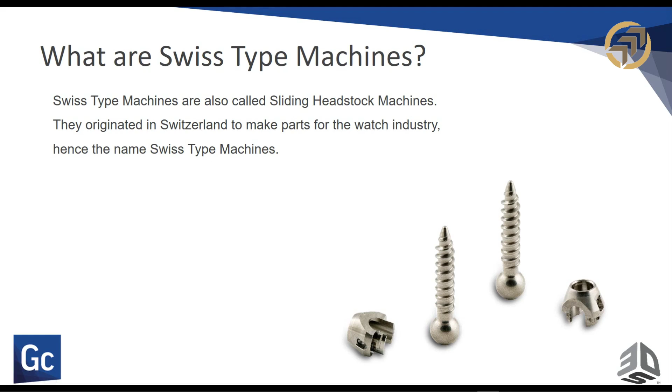What are Swiss type machines? Swiss type machines are also called sliding headstock machines. They originated in Switzerland to make parts for the watch industry, hence the name Swiss type machines or Swiss machines. Let's look at some Swiss machines. Let's see what we have here. All right, jumping right into it.

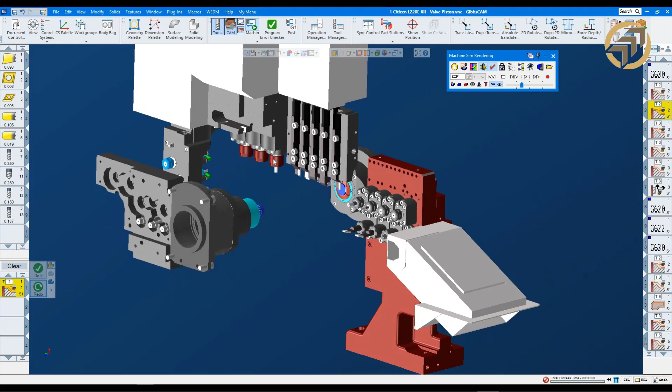Okay, here we have a Swiss style machine with the sliding headstock and the guide bushing on the right hand side. Our sub spindle is on the left. We have, of course, the gang with our turning tools on top, some milling tools on the top as well. Then this machine has a B-axis with tools that can access the main spindle, and on the other side you can access the sub spindle for B-axis machining angular features on the part.

And then we have another set of tools, four back turning tools. The upper ones are live, the lower ones are stationary, and then we have a parts catcher where we drop off the part once we're done. All right, let's run the part and see what's going on so you have a little bit of an idea what we're going to be talking about.

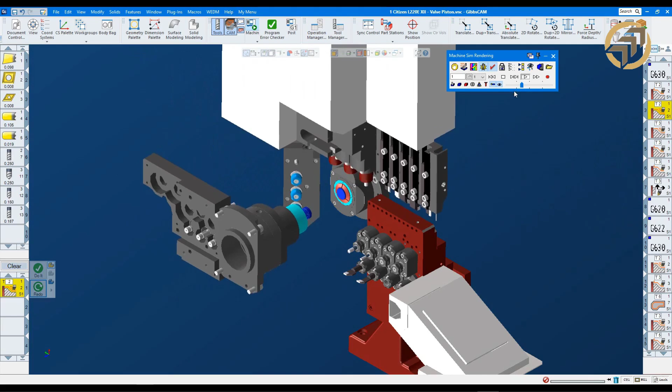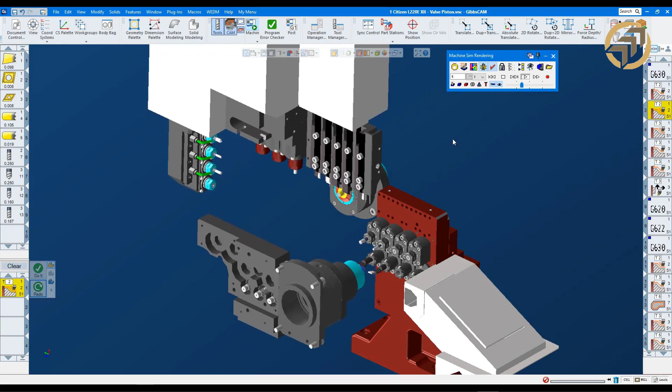Okay, so we are machining on the sub spindle with our B-axis right away, putting some angular features on it. Then the sub spindle goes over, machines the back side of the part on the fixed post, and the main spindle tools on the gangs machine on the guide bushing with the sliding headstock. Let's continue on. Let's watch the part running through.

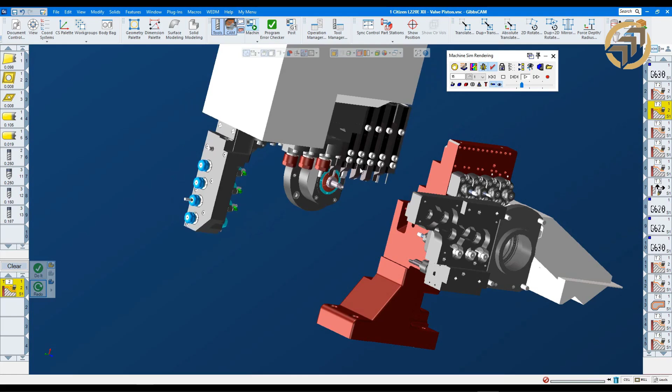Here we're machining the backside with the sub spindle tools over on the main spindle, doing some drilling, then more machining on the main spindle, grooving, more grooving, and once we're all done, we do some B-axis machining on the main spindle as well, putting some nice little chamfers there, and then we continue on.

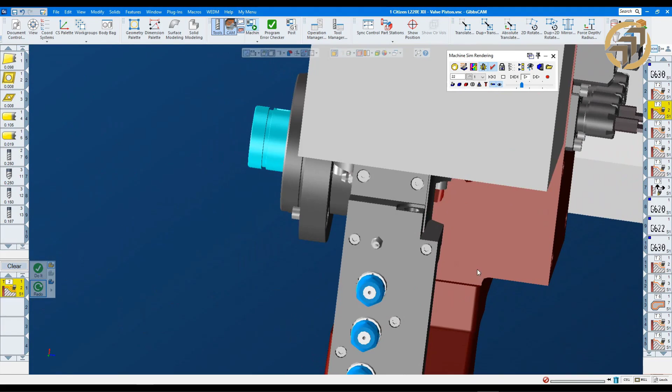Machining our part, more grooves. This is a valve piston, so there are lots of grooves on there. Now the sub spindle came in and is picking up the part. We're doing cut off, and the sub spindle returns to home.

Okay, we're going to look at it again, but I want to show you first one other thing here, where we usually select our machine. This is what we call our DCD, Document Control Dialog. Here we select the machine, whichever model we have on our shop floor that we want to program.

The material that we're machining, the size of the material, facing allowance, how long the part is, stock size, the gap between the tools and the guide bushing. Those numbers are grayed out because they are fixed depending on what guide bushings you're using, and this length here is quite important. This is the length of the guide bushing, basically how long our part is being supported when it's being pulled back inside. That happens of course on the Swiss machine.

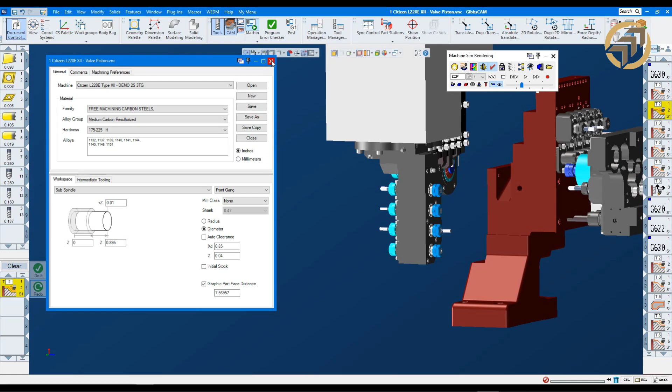And then a couple of other things, auto clearance, stock approach and retract, and then some more on the sub-spindle side, the stick out length, how far our part is sticking out after we cut it off. This is pretty much it. We are in inch or millimeters, depending really on our part, which way we want to program. It doesn't really matter. We can do both. I want to close this again.

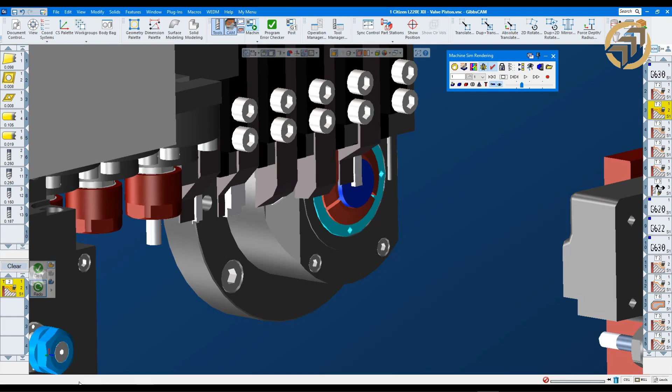And then I want to show you something that's quite important for Swiss style machines. First I rewind, of course. Let's do a rewind, and then look at it again, just like this, and I run it a little bit to a spot where I want to stop it, and we're right there, where I want to show you something that's rather important on a Swiss style machine.

So on Swiss style machines, the stock is moving in and out of the guide bushing, the red part here. So it happens once we start machining the part on the front. I'm slowing it down a little bit. As you can see, we're machining the diameter, and then we machine again, and we pull back the stock into the guide bushing.

And this is something that we have to be very careful with, because we may have left a burr on the outside diameter with our first cut, and when we pull back into the guide bushing, we may actually damage the guide bushing with that burr that's sticking out. So if I keep going,

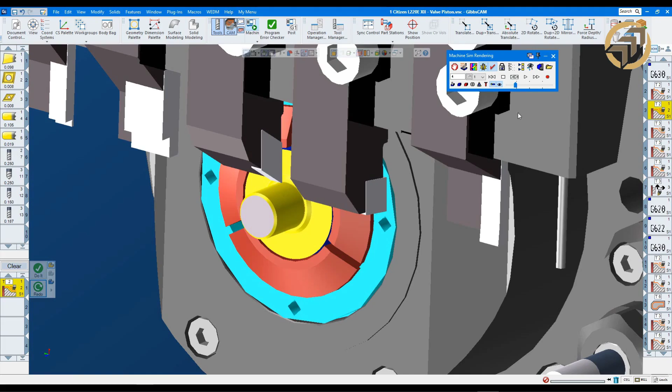I want to show you what we have in GibbsCAM that really lets us take a nice chamfer on that outside edge that we have machined, so when we pull back into the guide bushing, we are not sticking out that burr. Okay, this is our operation.

This is our roughing toolpath, and what we have here is what we call chamfer bar. When I check this, I can set the length of the chamfer that I want to put on top of that, and then which way do I want to machine it? Forward or backward? I personally prefer the backward motion. So let's do this, and I do a redo,

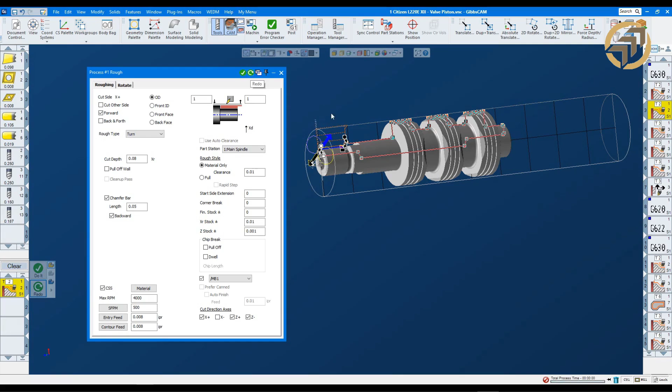and now we have a nice chamfer on our outside diameter. So when we pull back in our guide bush, we are nice and protected. We don't damage our guide bushing anymore. Okay, let's go back again, rewind, speed through it real quick, and slow it down again.

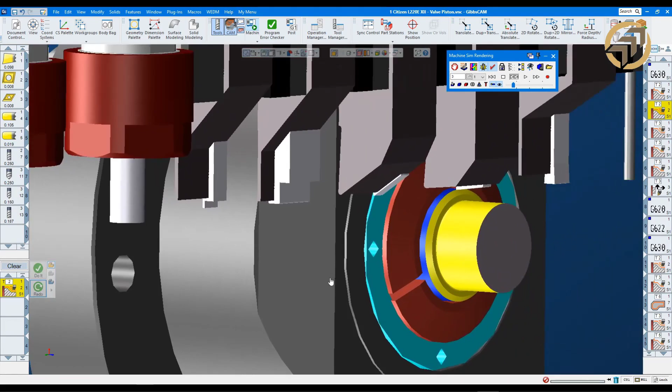And what you will see here now, it's going to pull back and put that nice little chamfer on that outside diameter. We see this on that side a little bit better, and we can continue on machining this part. So it's a nice feature that is very important for Swiss style machines. Any type of Swiss machines, we have that same feature. Even, believe it or not, on fixed headstock, we can actually program it that way.

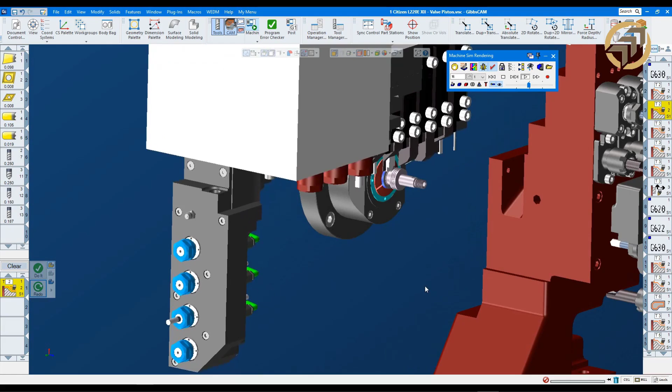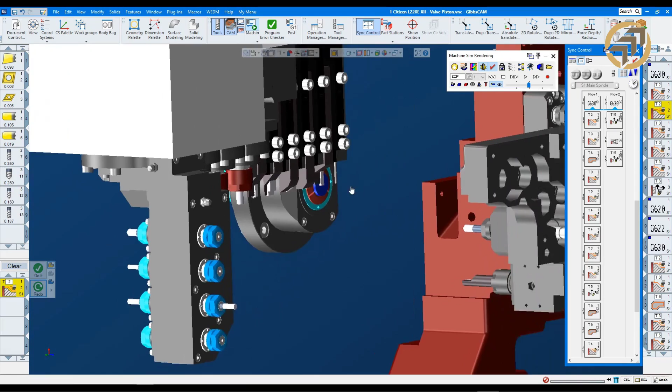Okay, so we can real quick look at our sync control, and then we're going to move on to another part. Sub-spindle comes in, we cut off the part, and we're done. Sync control manager. This is basically what we have for all our MTM machines, Swiss machines. What we see here are all of our operations from top to bottom. This is the one we just modified. We have the main spindle gang and then the sub-spindle gang and tools that work for the sub-spindle.

And here we have our Swiss machine modes that we have to program certain machines to put them in a certain mode that it requires to do this, that, and something else. Okay,

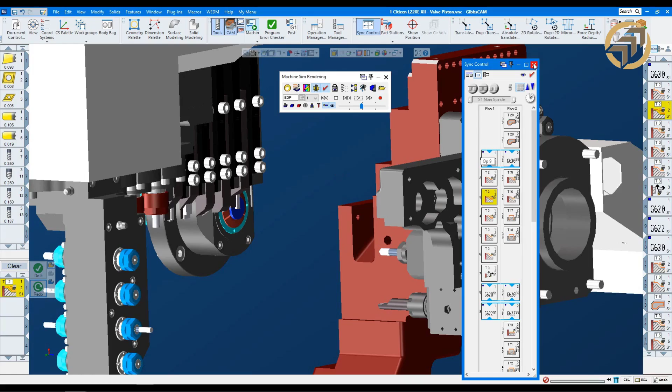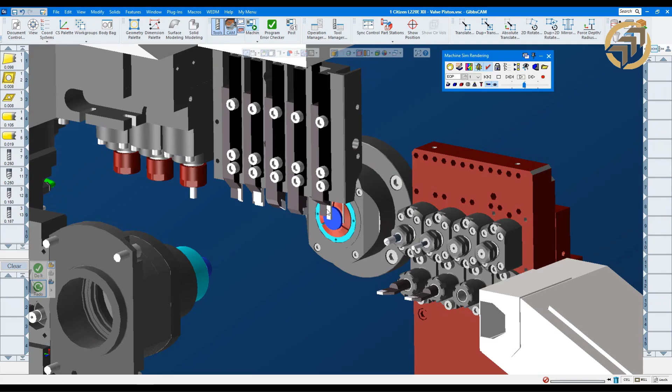let's move on. I want to show you another machine. It's very similar, and the part is also very similar, not quite exactly the same. This one was the sliding headstock version where we had the bar stock being pushed in and out of the guide bushing. Now we're switching to a machine that's the same machine, but it has been modified to be a chucker.

Okay. When I say it's a chucker, let me move this around. There we go. So what you see now, the guide bushing is not there anymore. That piece is basically our headstock, but it's moving out, and we stick out our part as we would on a normal fixed headstock machine, machining the part.

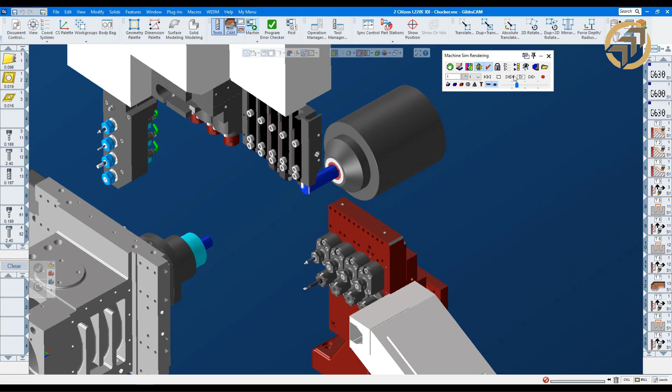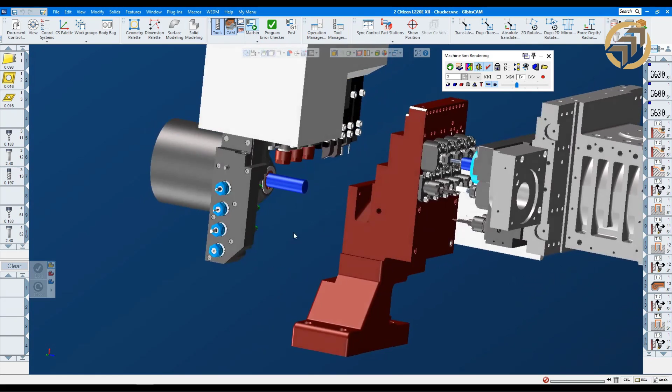I run this real quick, and then we're going to see what's going on on the main spindle side. I move it around a little bit. Let's do this. Okay, there we go. Now, see that? Now we are machining, and our part is being fixed and clamped in the headstock, and the whole headstock is moving, and that we call being a chucker.

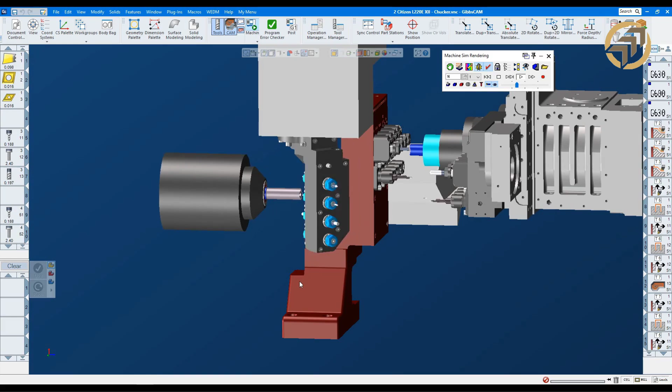So it's the same machine, but it can be modified from sliding headstock to a chucker type machine. Similar parts, similar features, some machining OD, ID, things like that, and we are done. We pick the part up. The quick difference on this one is

in our DCD, the document control dialog, here we don't have the symbol and design of our guide bush anymore. This is now basically just our stick out length of the part. Again, our part stock, my facing allowance, and whatever length of the part is sticking inside the headstock. So this is the difference between sliding headstock and chucker documentation dialog. Okay, let's move on to another machine.

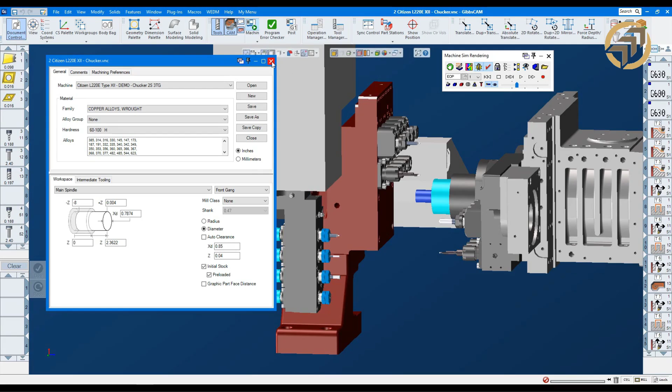Now let's switch to this one. A very common thing on Swiss type machines are bone screws. This is one of those bone screws. It has quite some nice features on it, and we're going to be using our thread whirling heads. What you can see here, we have a coarse thread going halfway through the part, and then we have some fine threads, but different shapes. The first two are different than the next two.

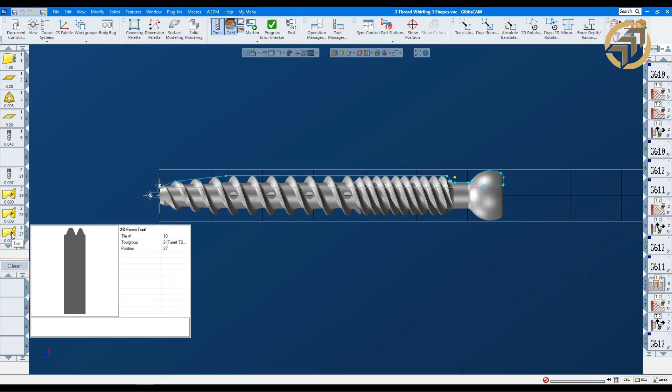So you can see that when we machine it, there are different shapes of the thread, and I can show you this real quick in our form tools that we're using on our thread whirling head. This is the one for the front part of it. This one is more an edgy type of thread, and this is more the round type. So those are different shapes on the bone screw. Okay, with all that said, let's look at the machine.

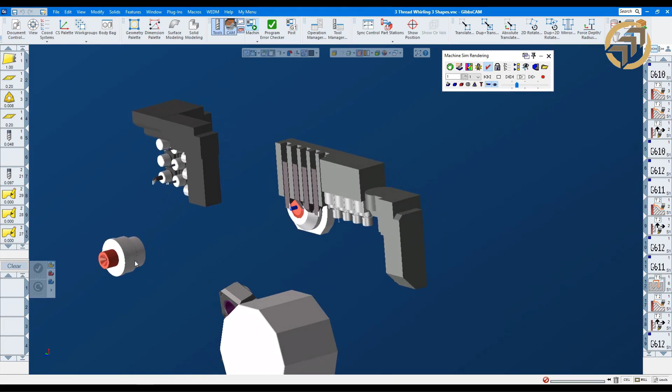So this one is a little bit of a different configuration. Of course, again, we have a gang, some live tools. Even this one has a B-axis on that side, and tools on the back side for the subspindle, and then we have our turret with our 3 thread whirling heads to whirl those 3 different shapes on the thread on the bone screw. Okay, let's go ahead and start machining.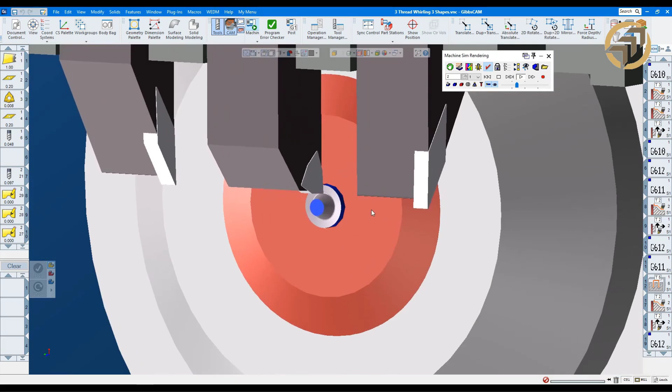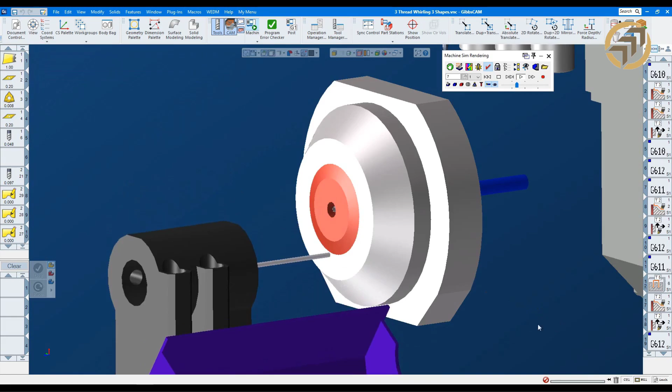So we're machining over on the main spindle, turning the OD. Now we come in and do some drilling. It's quite a deep hole there, going all the way through the bone screw. And after that, we're gonna come up with our sliding headstock. Nope, with our thread whirling head, I'm sorry.

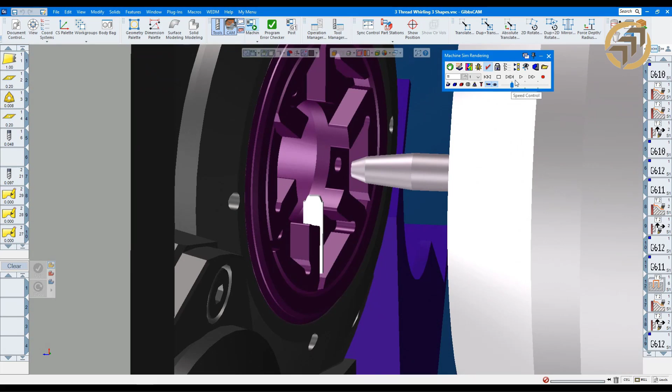Okay, and we are just about there, and I want to zoom in a little bit so you can see a little better what's going on. So this is the insert for our thread, and we're gonna do it twice because it has two starts. So a little bit more. This is the first start, pull back out, and this is the second start. All right, so this is our whirling head for the coarse part of the thread on the bone screw.

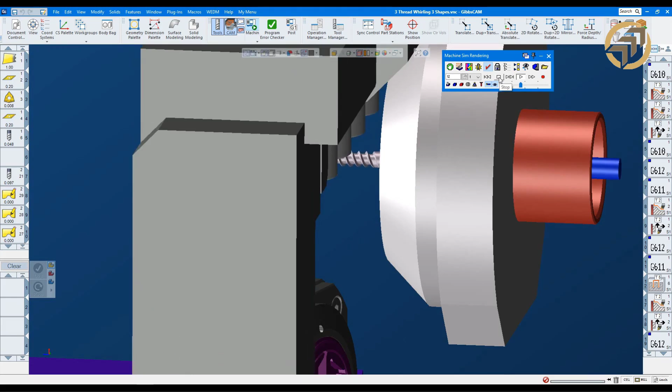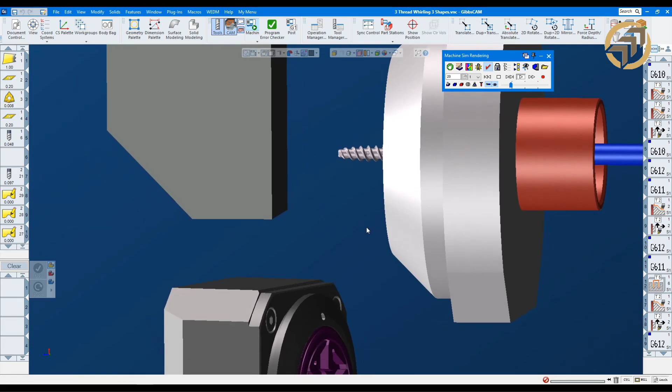Okay, now we're gonna do a little bit of drilling. Okay, a little bit more turning, and I'm gonna slow it down again. Okay, and then we come with our other thread whirling heads and do the finer shapes of the bone screw. Of course, we have to pull back into the guide bushing, make room for the thread whirling head to come up without hitting. So this is the next one.

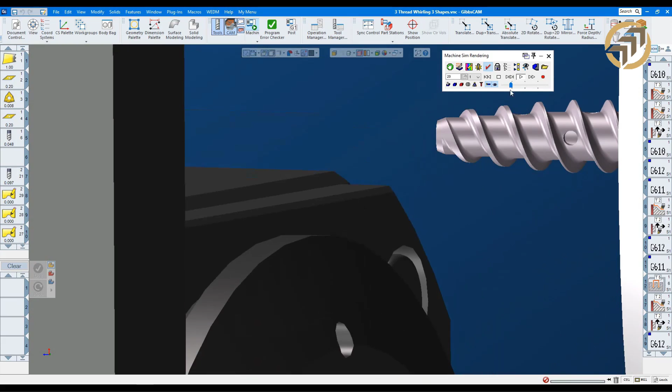So the trick here is actually really to find the end of the coarse thread. We're pulling out again. This one goes away and then brings up the other one, the final one. Come on, there we go. And this is a different shape. Again, the trick is to match perfectly the previous threads being machined with our whirling heads.

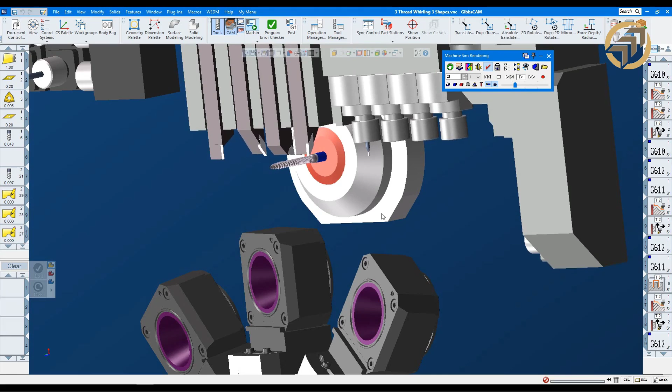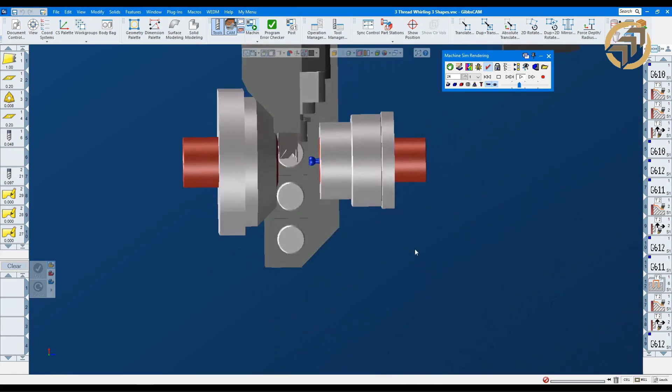And then we finish, of course, the part, machining the head and the back. And then we come in with our sub spindle. Let me move it around and pick up the part, cut it off, and we're done. Okay, there comes the sub spindle, cut off, and sub spindle goes home. That was this. Now let's look at another part or another machine.

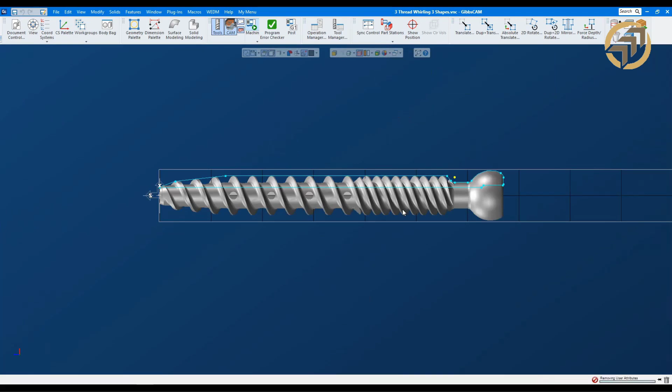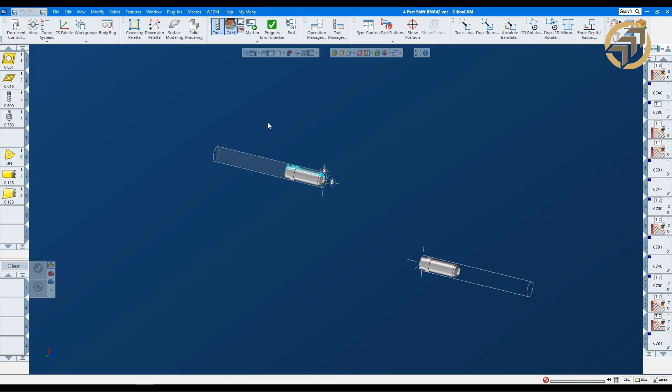Actually, it doesn't matter so much the part, but this is something quite unique as well. It's not necessarily a sliding headstock machine or a Swiss type machine, but this machine has a feature that GibbsCAM uses. GibbsCAM MTM is very well suited to program this kind of machine. And I'm going to run the part and you will be amazed what you see.

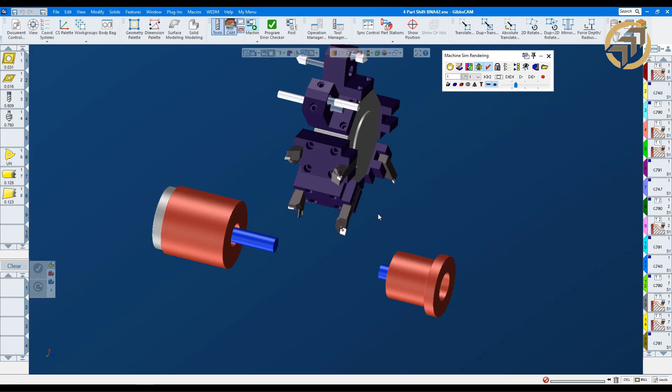What you see, left side is the main spindle, right side is the sub spindle, and we have a turret. It's a relatively simplified simulation, which actually in this case I really prefer, since we need to see what's going on in our simulation and potential collision of the part and the tools.

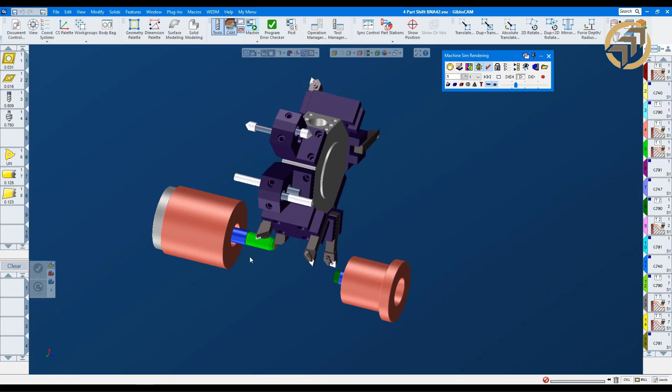Okay, let's run it. And what you will see in a second is that the sub spindle is basically chasing the tool that's sitting on the turret. Actually the turret is moving, machining the part on the main spindle, while the sub spindle is chasing the other tool around while it's machining on the front and the main spindle.

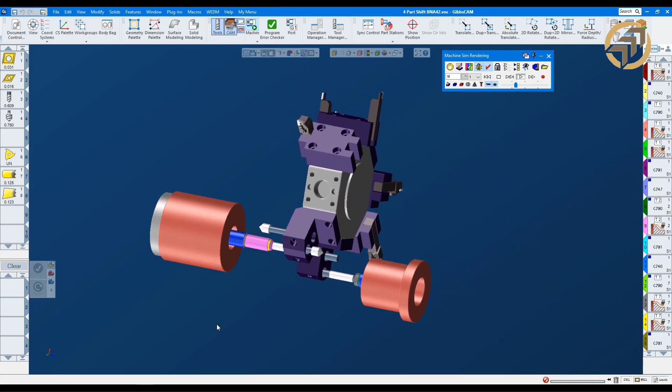It's quite a complex way of programming these kinds of machines, and typically I know that operators and programmers are pretty scared to program these kinds of machines, but what we do in GibbsCAM, we give you the tools to program that type of machine easily and, of course, without collision. That's, of course, the important part.

And whatever machine modes these types of machines need to let you safely program them is, of course, key to using the right programming system, in this case GibbsCAM. Of course, GibbsCAM gives you all the tools that you need, even for this type of machine. Okay, where are we?

This is pretty much what I wanted to show you on the Swiss type machines, how we program them or what's available. Of course, I could go into many more details, but that would actually then end up in a training session, not so much an overview of the general kind of Swiss type programming that you can do with GibbsCAM. Okay, with that said, I want to open it up for questions.